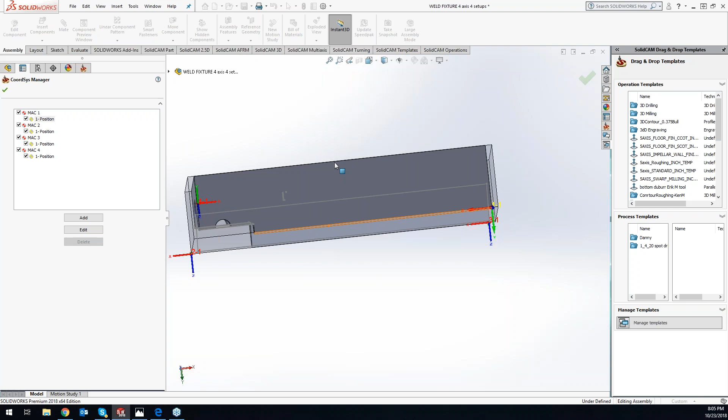That's a great idea. So what I did is I set up my Mac 1, and this is how I would do it, setting up in multiple fixtures, but this is completely up to you guys. Like I said, there's more than one way to do a part here.

I can't say more than one way to skin a cat because Ronnie's got a cat, so I can't pick up. We are animal pet friendly. Yes.

So what I did with my Mac 1, position 1, I want to create a different Mac for each setup. So this is going to be my 54, 55, 56, and 57. My 54 is aligned right with this hole and this flat right here.

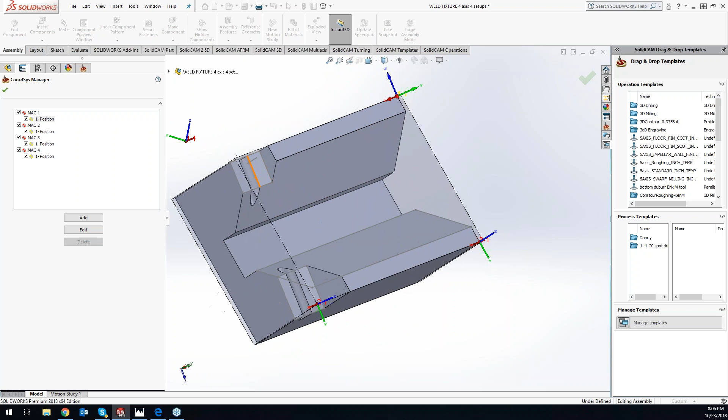So when I grab this coordinate system, all I did is click on here. So when it's sitting in the vise, I can probe off this side, probe off this other side, and then take a Z point right on the top.

Now let me uncheck this one and this one. If we go to our Mac 2, get this flipped around here, we are going flat in here. Basically what I want to do is get the majority of the material removed out of here, is what we're shooting for.

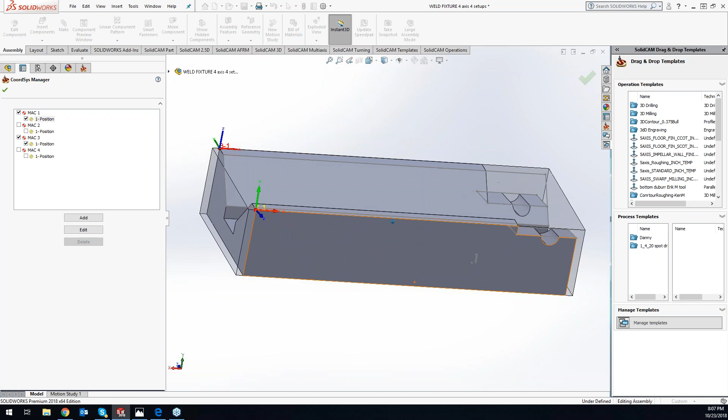Now I uncheck these. I'm going for Mac 3. What was I doing on Mac 3 here? Got to remember, we're straight up and down. Maybe my Mac 2 wasn't straight up and down.

Oh yeah, we're kicked off at an angle here to machine the flats. That's where I was going with it, to machine the flats on here and right here. Mac 3 is going to be straight up and down, getting this material out of here and doing some roughing on here.

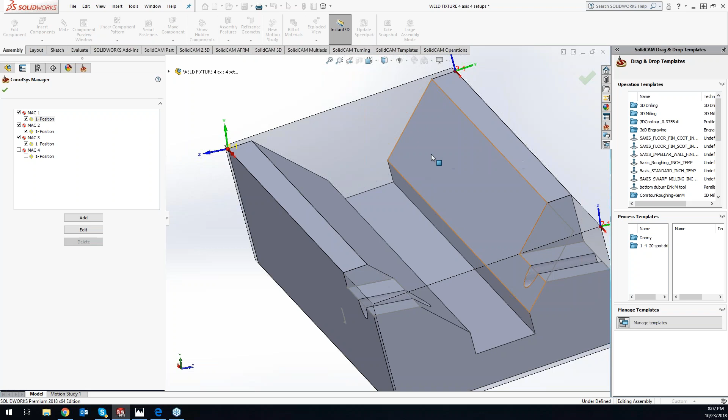And then Mac 4 is going to be our angle. So it's going to be sitting in soft jaws. We'll side mill this face over here and flat end mill the face over here. So hopefully that kind of makes sense for everybody.

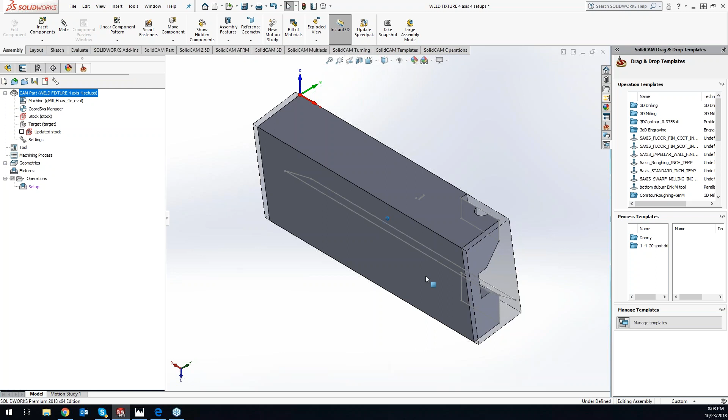So now let's get the ball rolling here with our Mac 1. What I did is I brought in a vise with soft jaws for each setup that I want to be doing. If I go to my SolidWorks over here, you can see I have my Kurt vise multiple different times in here. So what I did is I added these as a display state.

Now, it's completely up to you guys, but I did this as a display state versus using a configuration. The only reason is, with a configuration, I'm suppressing, whereas with a display state, I'm just hiding certain components.

So if I go to display state number 1, you'll see that I have my vise already set up in here. Basically what I want to do is label that as a fixture first. So we'll go ahead and do a machine setup, and we are going to do setup 1 and do a new fixture.

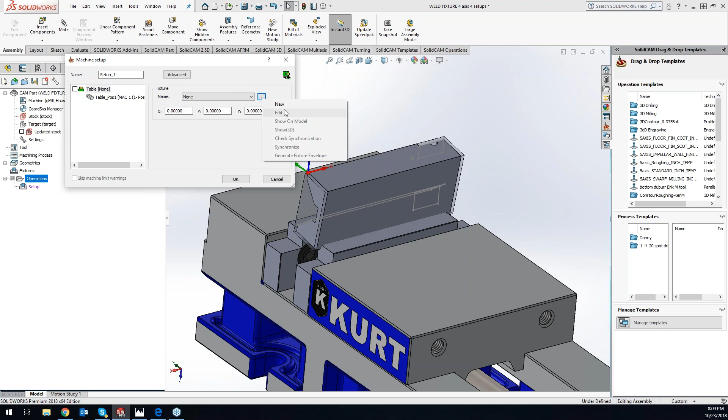And I'm going to grab my soft jaws and my Kurt vise here. Good enough. And we'll just say G54. Save that. Okay, so we got our setup 1 here.

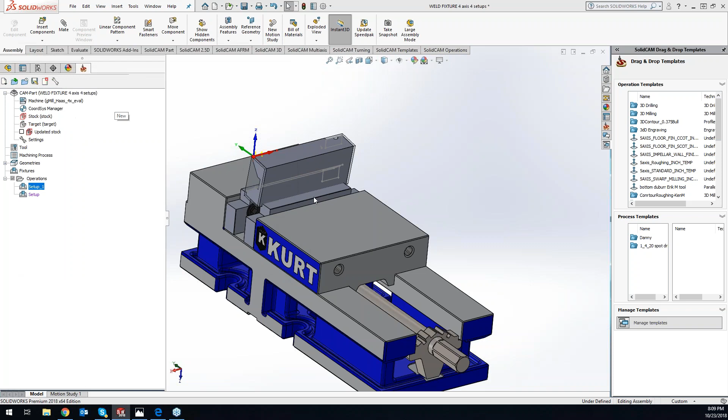So now I can add my milling operation, and we will drill out that hole first. I'll kind of buzz through this. So we got our drill, tool select. I still have my tools in there from last time, so we'll do drill depth, 0, and we'll do a diameter.

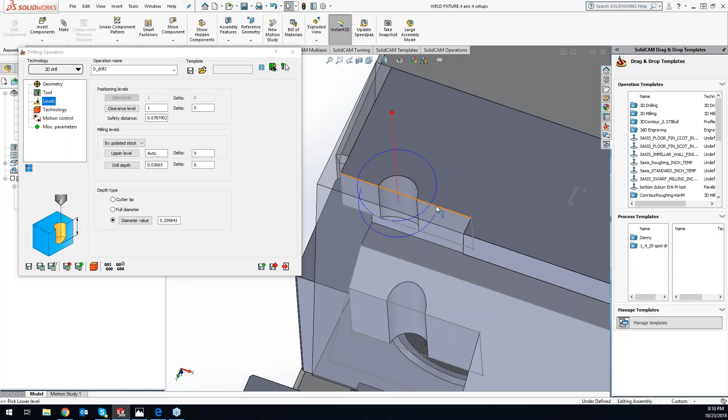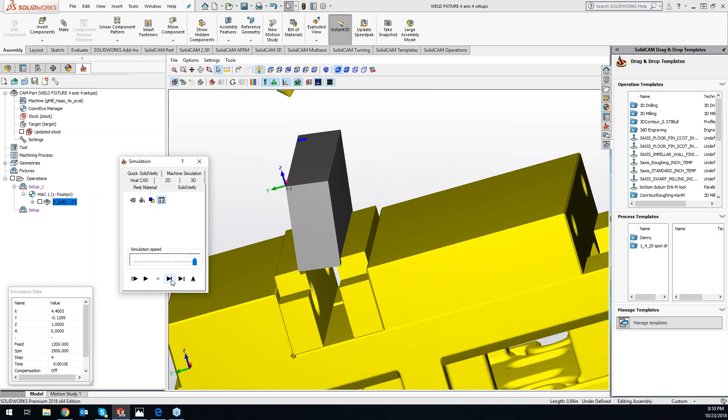Kevin, probably a stupid question, but you're doing all this in 2D, correct? This is all 2D, correct? Yep. Yeah, so we're not utilizing any of the 3D functionality in here.

So pretty much 100% of all our customers can be doing this part. Perfect. Okay, so we got our spot drill.

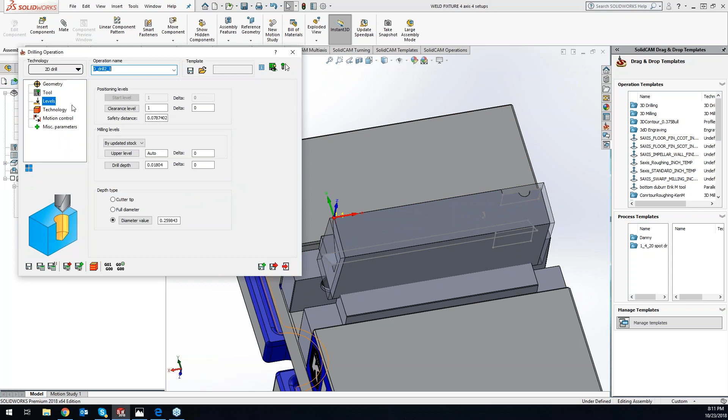I'm just going to do a save and copy here and change up our levels. We'll go down to there and do a minus 25 thou, full diameter, and let's just do a peck, G83, 100 thou, and grab our drill here. All right.

Okay, so now you can see we're drilling all the way through there, looking good. Since I have it kind of everything up, we are sitting at an angle, I'm going to actually machine my sides right now because we do have some stock on there. So we'll just go ahead and add, oops, I don't want to do an iMachining for this one.

I'm going to do just a simple profile.

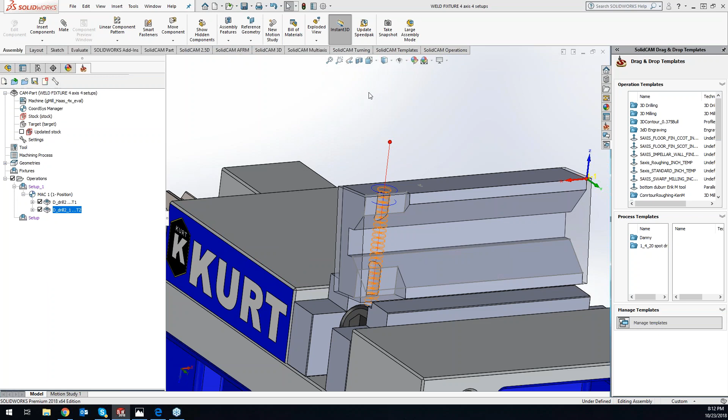Okay, got our geometry, tool, select. Sorry guys, I'm trying to buzz through this as fast as I can because a lot of this is just repeat. We're kind of more focusing on the setups.

Ronnie's already barking at me. Just get along with it already. I can hear you, Ronnie. Don't worry.

All right, we'll just go a little bit past, minus 50 thou. I'll take some rough passes, 25. All right, let's make sure we're up to size.

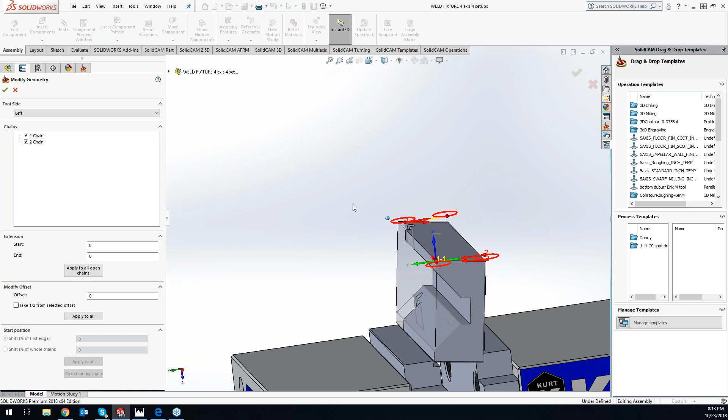I'm shanking out here, so what I'm going to need to do is also extend out my geometry. 0.3, apply all. So I'll verify.

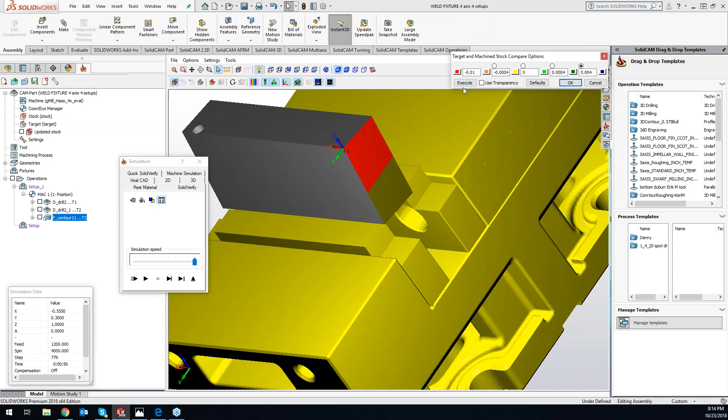Okay, so it's showing a little red right here because I'm shanking out. I didn't put an actual relief shank in there, but we'll just go with the relief shank for right now. Let's just do a stock target comparison.

We're green, and green and yellow is what we're looking for. Let's check our hole for placement. We're green and yellow there, so we're good to go. So now we can move on to our next setup.

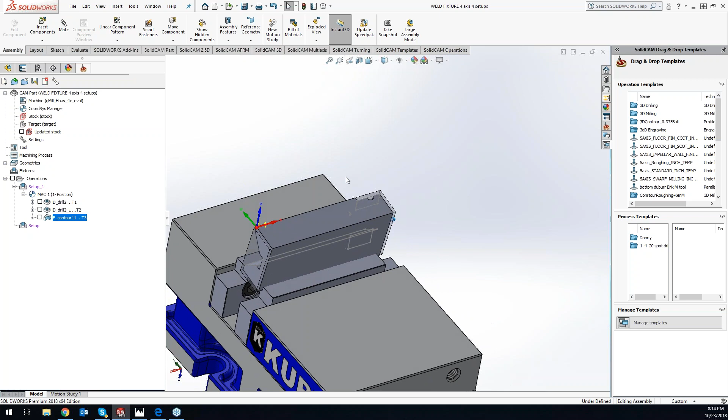So now that is my Mac 1, everything I'm going to be doing on Mac 1. Now let's go ahead and head over to my display state. I'm going to pull up my Mac 2. So now basically what I'm going to be doing is machining off these flats on here.

So let's go ahead and I'm going to do edit the setup, and we'll say new fixture. Grab this and this. Just grab the important stuff here.

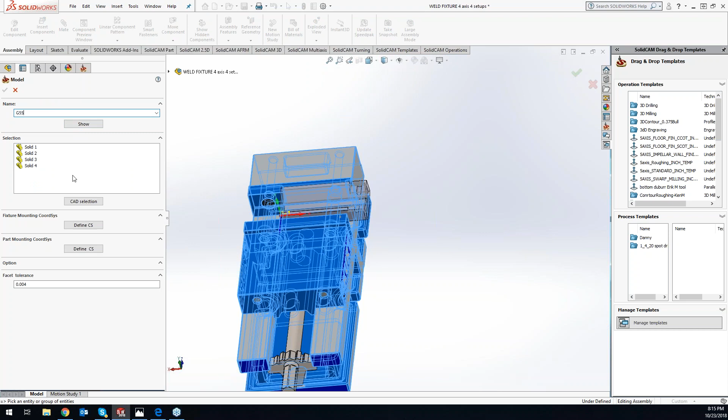I'm going to see if I can actually do edit, and I want to label that as G55. Okay.

Now let's go ahead and add our milling here, and we can go with iMachining here. And I'm going to do something a little bit different here for you guys.

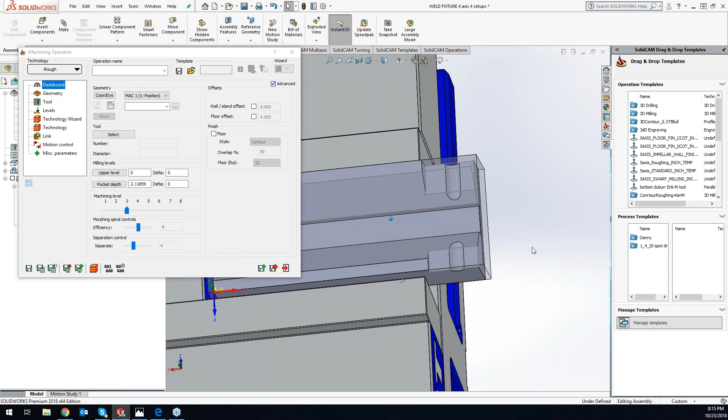So what I'm going to do here is I'm just going to do a quick sketch. And you guys can do sketches while you are in an operation itself.

So now for my geometry, oops, I need to switch this over to Mac 2, which is our 54 or 55. Grab this as geometry, and I'm going to do mark chain as open, and then mark open edges, and I'm going to turn this one into a wall.

Now my levels, and like I said before, since we're working on angles, I always like to click around just a little bit to make sure that number doesn't change. If that number is changing on your depth, that means our coordinate system isn't parallel with that surface there, so we know something is up.

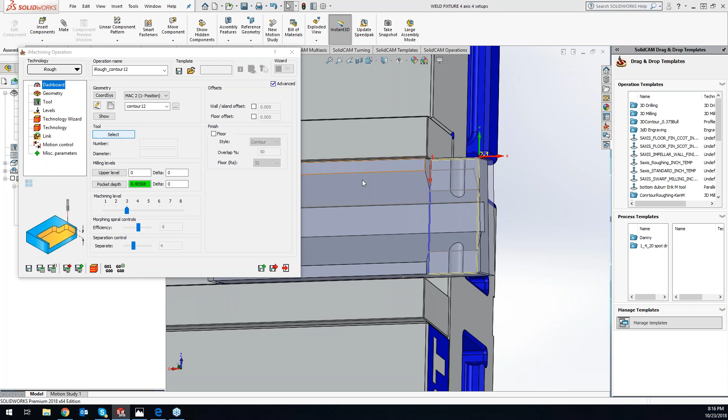All right, so we'll grab a 1/2-inch end mill here, and do iRough plus finish. Compensation, we'll do a floor.

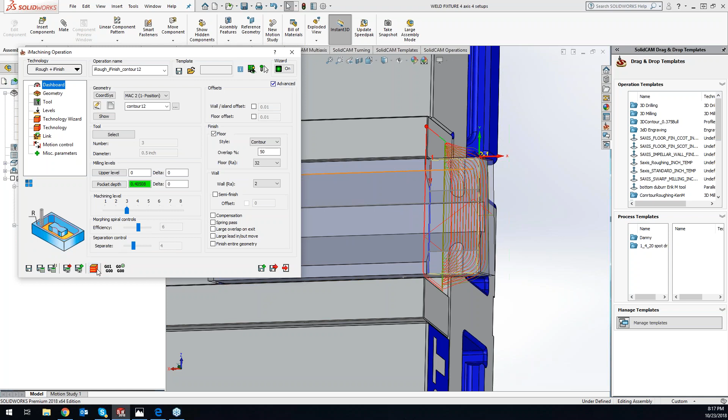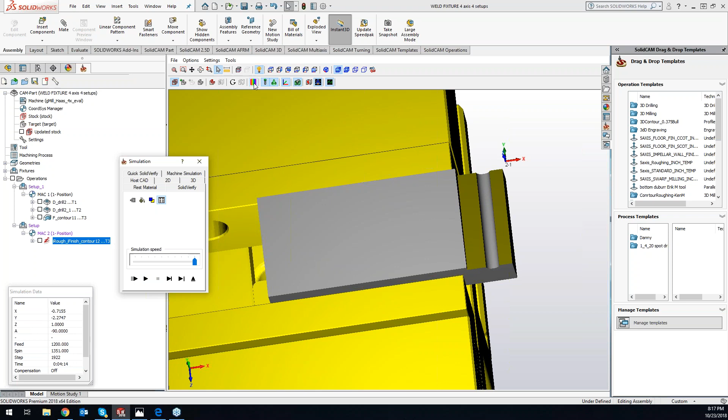And now it will pull in our second setup here. And let's just do a sanity check real quick. So we're green, we're up to size.

And like I said before, usually I should have a 1/10 in here. Okay, let's try this again here. So if I put just 1/10 in there, this all has to do with tolerancing. This model that we're representing right here is not what you're going to see on the machine. It's all tolerancing that I've set up in the accuracy of the model. So I have a pretty tight tolerance set up for this model, so it should show really accurate.

But now if I put a 1/10 in there as my good part, then everything that is at that 1/10 is going to show right up to size. We can even do a side, 3D mouse is stuck. So we got yellow all the way around. We're golden, and that's all I really need to do on that setup.

Now Kevin, while we're going over setups - yep. Maybe you could go over why Mac 2 is in purple text under that second setup. Oh yeah, you can see that. So I missed something on my setup here.

You'll see, so what Greg is talking about is, see how my setup up here is purple, and then my Mac position is in black. Now down here, I have a purple setup and a purple Mac. What's happening here is I didn't link my setup to my Mac position. And thank you, Greg, for that.

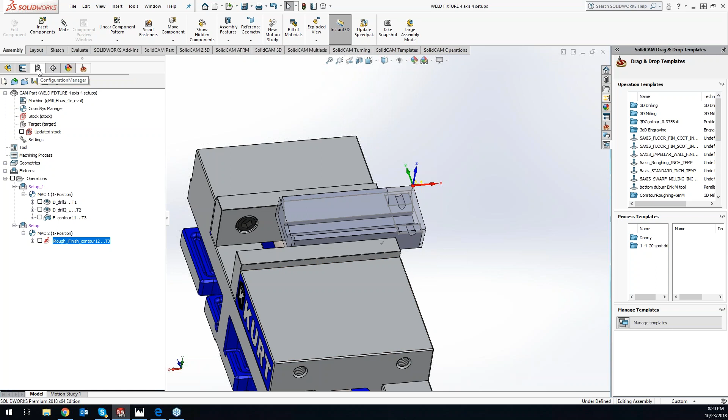So now let's go ahead and hop over to our fixture number 3. And as I'm going through this, if you guys want, let's say you're just running this as one single part, fine and dandy, but you can also think of this as running it on a table. So let's say you have a table with 4 different vices, your Mac 1 is your left vice, Mac 2 is the next vice over, keep going along. This is the exact same way you would set it up that way as well. Just want to let that be known for you guys.

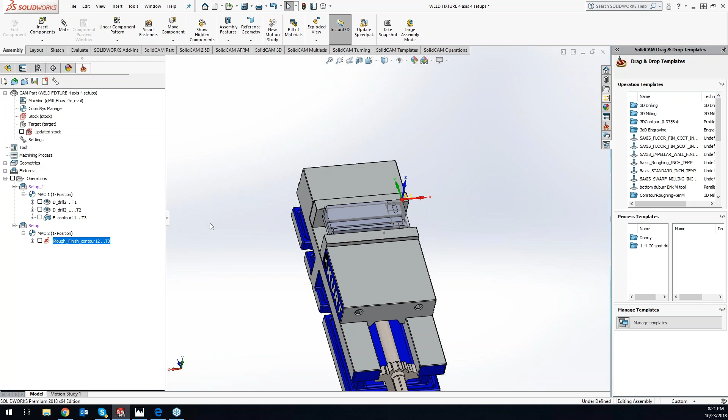Okay, so here is our setup number 3. So basically what we're going to be doing in this one is just hogging out the material inside here, using a basic pocket operation, or iMachining for that fact.

So first thing we'll do is a machine setup, say after that operation, and our fixture is going to be a new one, and we'll call this G56.

And I'll just click on all my components of that fixture. Like I said, I'm trying to do this as if we were using soft jaws in a lot of these parts. Now this one is clamping square on square, so all we'd have to really do is run parallels underneath there. But the ones that are on angles, that would definitely involve milling those angles into those soft jaws, or using a sine plate, kind of like what we talked about a few weeks ago.

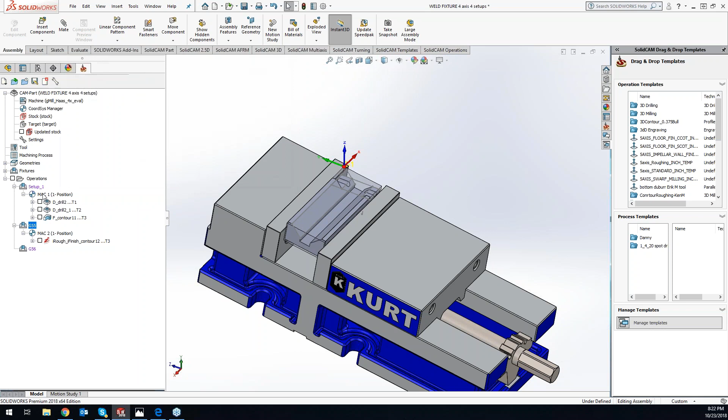Okay, so let's assign this to Mac 3. Hit OK. Now I can also rename these setups here. So I can do edit, and I can just call this G56. Edit, and we'll say G55, and edit G54. Okay, so now on our 56, we can do add milling operation, and we'll just do a simple pocket.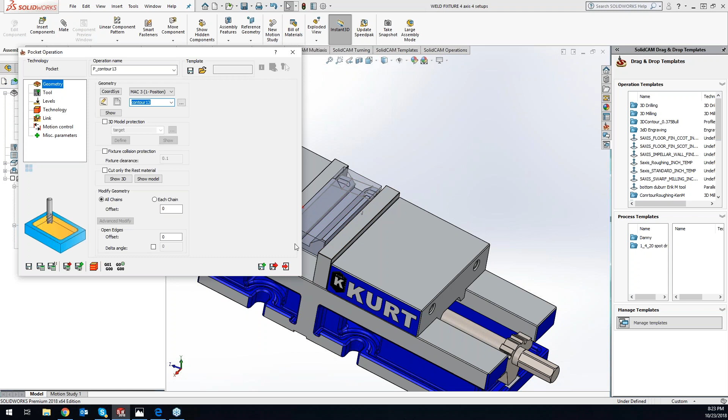And we got our Mac 3 grab, so I'm just going to click on that bottom face using our Smart Face technology. And what is the size of that? That is 0.52, so we can get away with our half inch end mill on there.

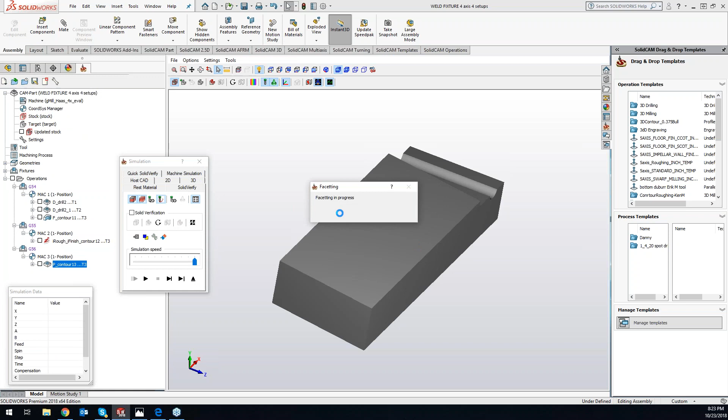Levels, profile depth, get down to here, and we can do step down a quarter inch. Looks good. And since we did use the Smart Face, it knows to start on the outside and work its way in. And when it's doing this faceting process here, it's basically pulling in the fixture that will also have full gouge detection and crash detection as well.

Hey Kevin, you've got a question in the chat area from Brent. He wants to know if you can put the G54 as a text placeholder instead of the 1-position next to the Mac in the coordinate system. Yep, so...

Greg, remind me to come back to that one when we're done here. Okay, well yeah, let's come back to that one. To answer your question, yes Brent.

So let's say I wanted to come in here, and maybe I wanted my position, my Mac 1 position 1, to be 57 for instance. I can just come in here and do edit, right click and do rename, and I can type in there 57 or 58 or whatever work offset you want in there, and it will post it out as that.

Don't do a 1-position or anything like that. Just do, you know, like for this one, we can say 54. We can do rename, we'll do this 55.

And it will automatically add that 1 in there. But you guys can come in here and rename these whatever number you want.

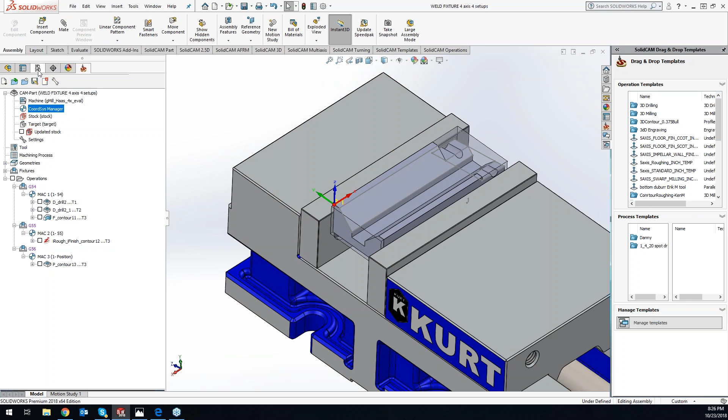So what I'm going to do is go to my display state, go to my setup 4 here, and for some reason that does not look right. Oh, because I don't have my coordinate system. Okay, so we'll wait to add that in there. But my coordinate system is actually up on the top right here.

So what we'll do is add our machine setup and do it after that operation. We'll do a new one, and we'll call this 57.

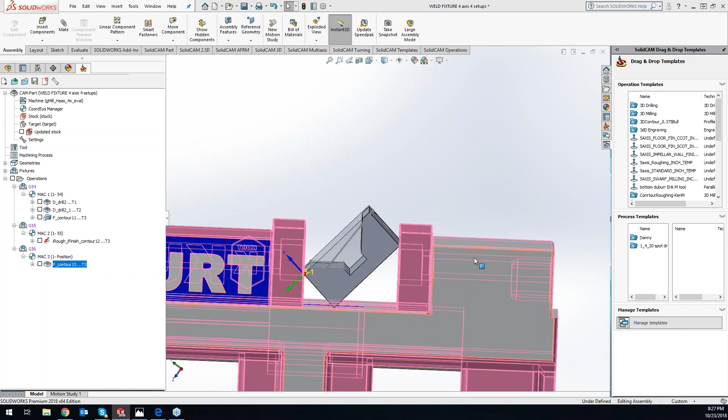Grab that, that, that. And by all means, guys, if you're a little bit newer to SolidCAM, it does not have to be a Kurt vise. You can have toe clamps, you can have vacuum tables—anything you want as your fixture.

Okay, so now let's go ahead and add our milling operation here, and we will just do a pocket.

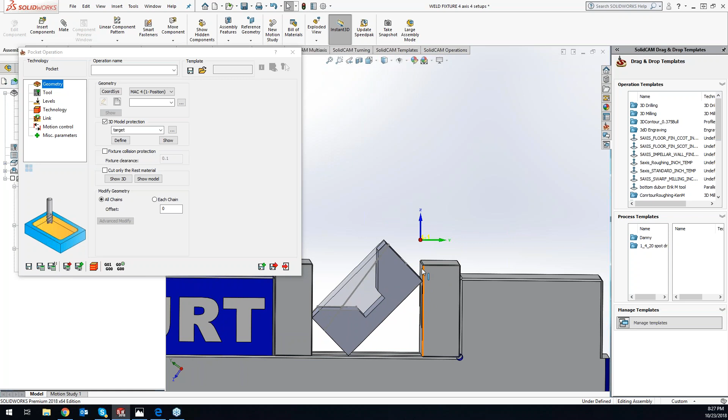So for this one, probing wise, you can kind of see we have a part, or a coordinate system, sitting in space. So how I would probe this part—and obviously, like I said, these would be soft jaws, so they'd be notched out—I would be probing the back of my vise for my Y-axis, coming over here probing the side for my X-axis, and then the top right on this edge for my Z-axis. So hopefully that makes sense for you guys.

So now what are we doing? Pocket. And then we'll do mark open edges, and I'll tell it this one over here and this one right here.

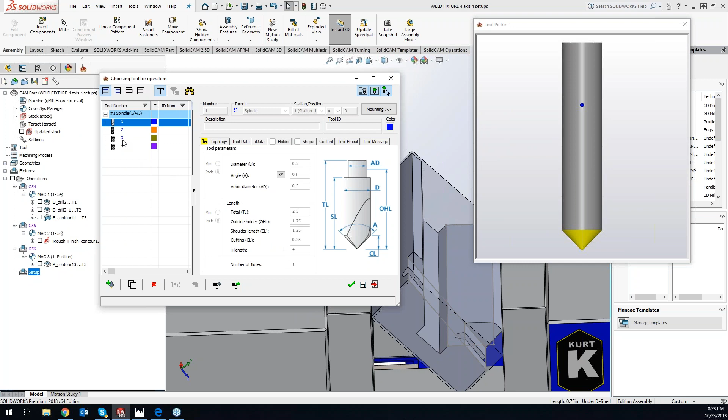All right, tool select. Grab that same half-inch end mill here.

Levels. Like I said, I like to click around just to make sure I'm perfectly level with my axes here. And we can just do 0.100 step downs. Save and calculate.

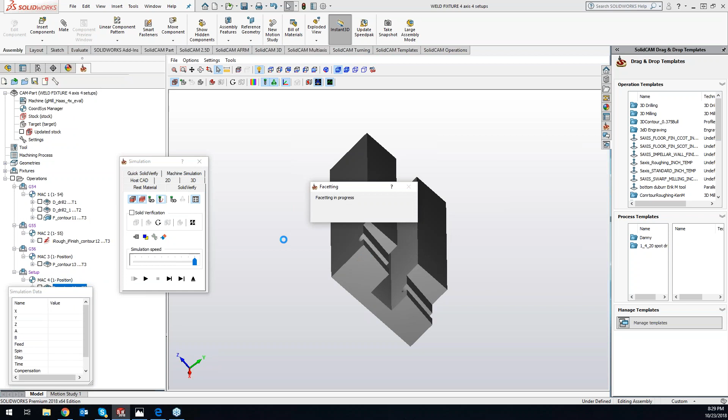We'll give it a second to pull in that vise here. Okay, so now I am machining a little bit of air—you can definitely see that. So let me get that fixed up here.

So let's say our upper level, let's go by stock. Calculate. Now we shouldn't be machining air.

There we go. And let's just do a quick sanity check here. So we're yellow, we're right up to size. So the only thing we really have left is to machine over here. Oh, my space ball is just like, okay.

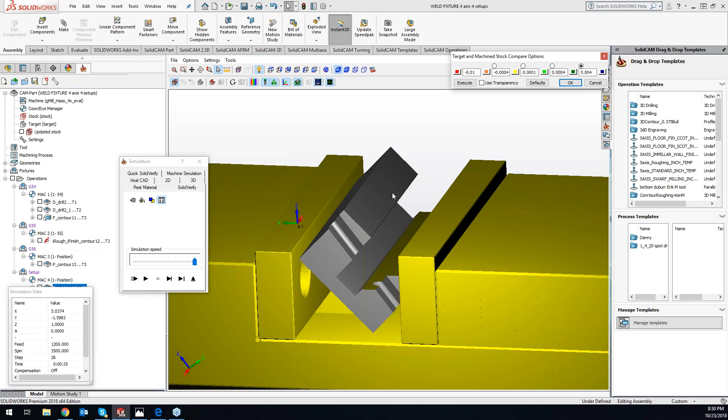So we'll go ahead and do that in the exact same operation we were just in. But what I'll do is use that one as a profile because I can side it—I use the bottom of the end mill to grab this face down here, and I'm also side cutting over here. So we can just do that in a standard profile here.

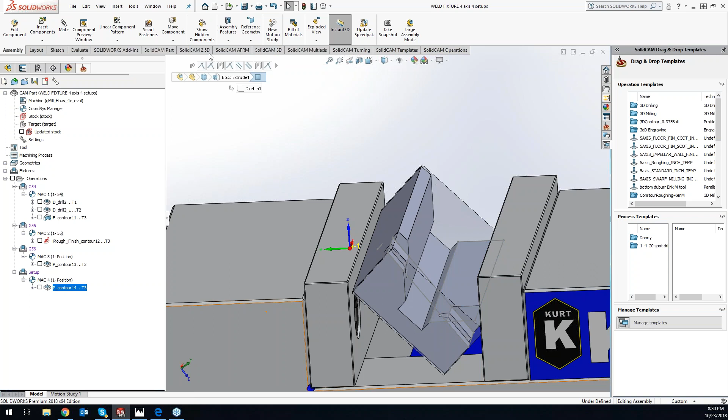Do new. And uncheck my tangent propagation here. And we'll grab that same tool.

Levels, come down to right here. And we'll probably just stay a little bit above because we don't have to go right down to that exact depth, because of this channel in here. So we can just do a positive, like a 10th out here.

Technology. So what I want to do is, if I take this all in one cut, it's going to be a little heavy. So let's just play it through real quick and you'll see kind of what I'm talking about here.

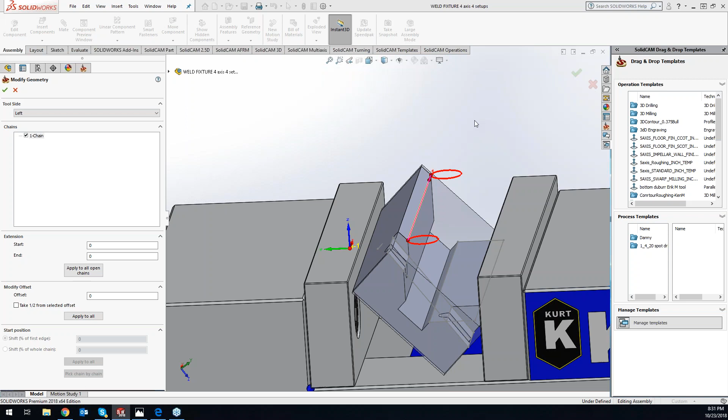So we're taking just a little on the heavy side here. And you'll see my chain didn't go all the way through—that's because I forgot to do one step here. If I go to my geometry button, since I clicked just that chain, we're not going all the way through.

So if I get a top view down here, I can actually extend my chain. We'll do 0.3 for our start. And what's 1.5? Oh, that's a little too much. Do 1.25—that's a good spot to end.

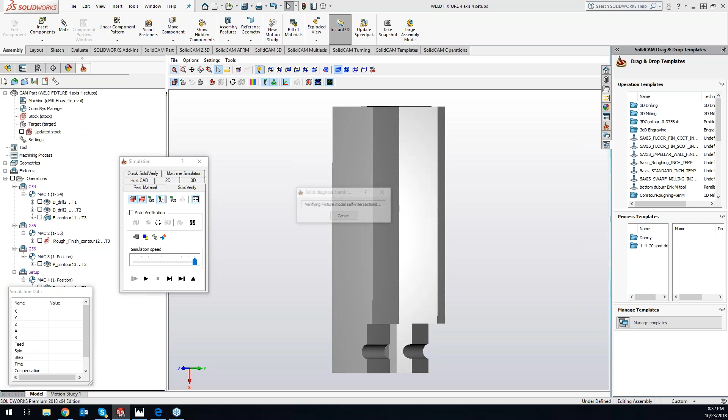Now what we can do is a step down of 0.100, or a 10th out here. Save and calculate. Simulate. Solid verify here.

And I went too deep. The great joys of solid verify. You can see I'm gouging right through there.

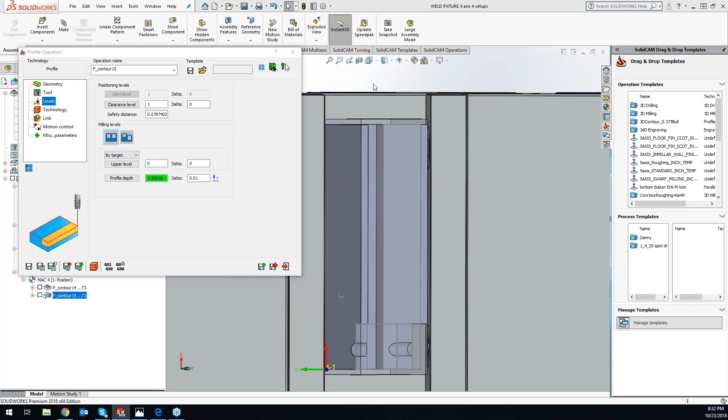So all I have to do is come into my levels here, and we'll just go tell it right to this exact point. I'll just go a minus 10th out, just to go a little bit past. Thought I was going to be safe by going the other route, but forgot about that.

All right, so let's play it through here. So now we should have a 100% complete, all yellow. Let's just get around. So we are golden, we got yellow all the way around. So now if we want, we can go ahead and play this all the way through and we'll be able to see all our different setups as we're going along.

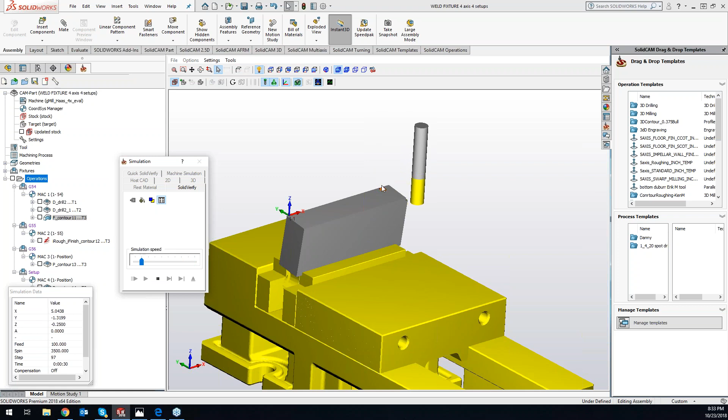So here's our first one. I'll slow it down a little bit for you guys. Spot drill. Drilling. We're going a little deep on this drill, but just wait for 2019 on anybody that does any deep hole drilling, got some cool stuff coming for you guys. Actually, more custom drilling than anything.

Now Kevin, do you have a machine simulation on this post? Looks like you're using an eval post, so maybe not. Yeah, I don't have a machine sim.

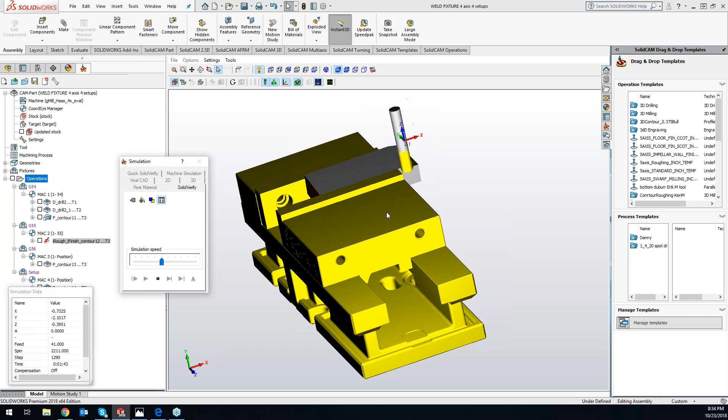Thinking since this is setup focused, you can show the machine preview in each of the setups. Oh yeah. Yeah. Get this kind of rotate around here. Okay, so there we have a complete part.

So let's switch over to a post that has... I don't have this one pointed. Give me 1 second here, guys. Let's see what I have for machine sim on this computer.

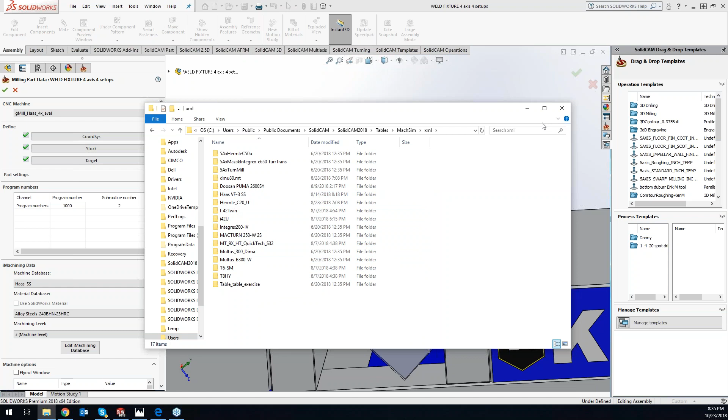VF3SS. So let's go to our Haas, VF3. Continue. Calculate everything here.

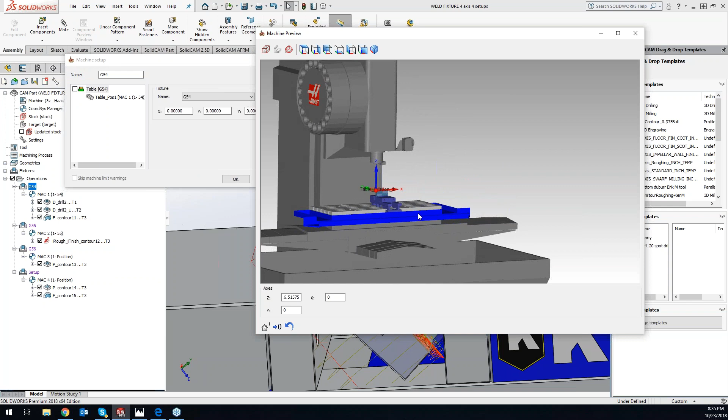All right, so what Greg is getting at here is the machine preview, which is this button right here. I totally forgot about this. So this will actually show you the machine as it sits in there. Now you can see with my machine sim...

My vise is custom made into the table. So what we can do is just highlight the Z, and we can actually raise up that vise to get it so it's sitting right where it's supposed to be. So it's a great feature to have in here, and you guys can see what it looks like on the machine itself. So you can see, maybe with this specific one, we're going to have this vise.

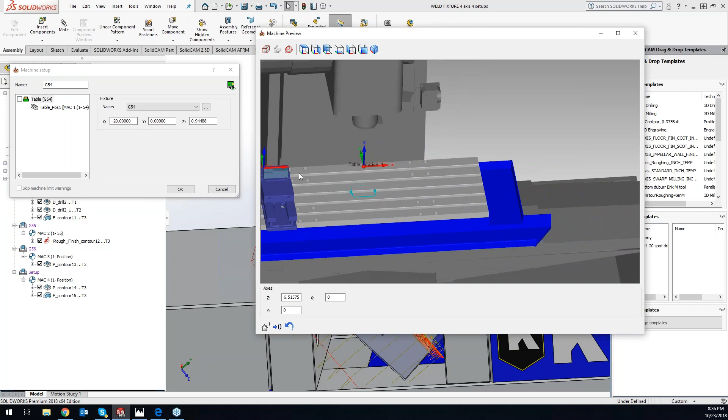I'll just do -20, maybe far over on the right side. Hit OK. And let's do edit, machine preview here. And that is definitely not how my vise is going to be sitting.

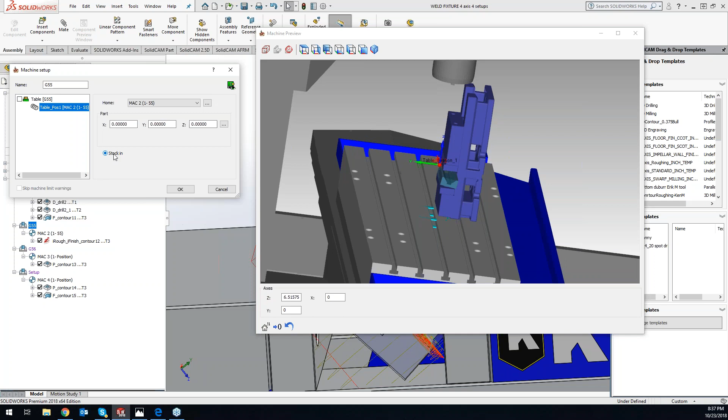Why is my vise sitting straight up and down here? Is that where I'm at 2? I believe on that one you created that fixture in Mac 1, so you'd have to reassociate the coordinate system for that fixture. But this is my 55, right? Yeah.

Oh, because I switched the 55 name, right? Yeah, you switched it after you defined that fixture. So it was still on Mac 1. Edit.

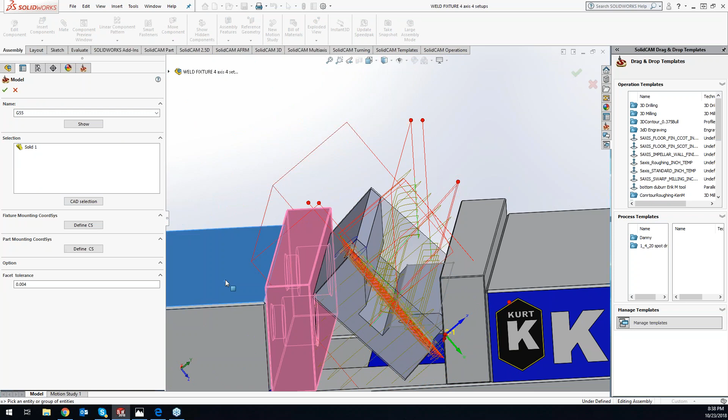And we'll just do unselect all. Come on Steve, you were falling asleep on that one, you should have known that one. Hey, remember man, I'm just a sales guy.

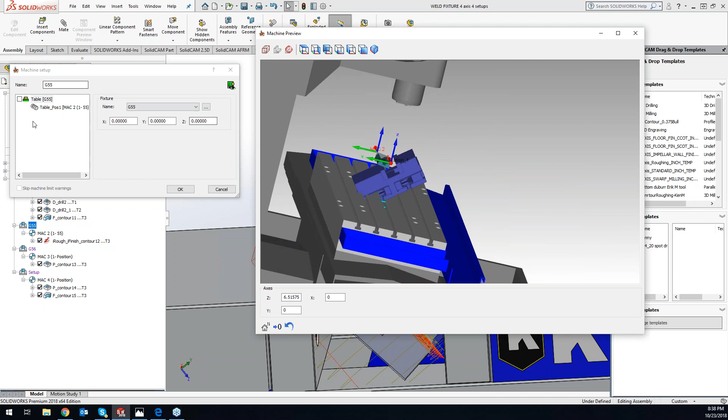No? Why am I all funkied up here? Back to... edit that position. Edit the fixture. And now take a look at the fixture mounting coordinate system to the part mounting coordinate system.

Okay, good call, there we go. That's what I messed up here. Edit. New. I'm a little rusty at these night classes here.

So now... I was just going to say, as you can tell, they're done live, not recorded. Yes, right? I want to keep these as live as possible for you guys so you can see. No. There we go.

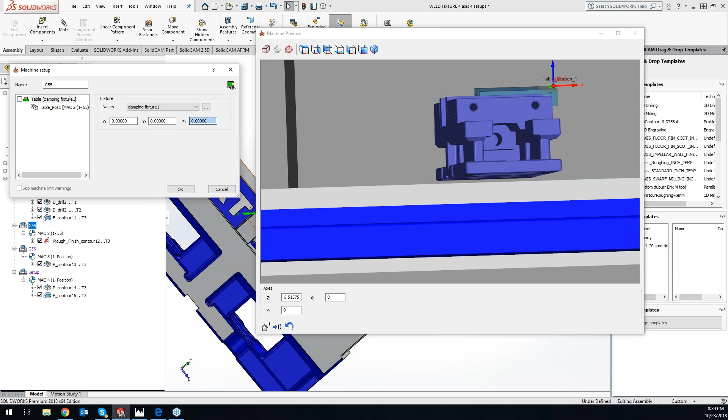And so let's see, our Z is sitting up a little bit, so we can lower him down. And we can, like I said, we did -20 on the first one. We can do like -10 on... oh, that's going to be a little close. Let's do -5 on there.

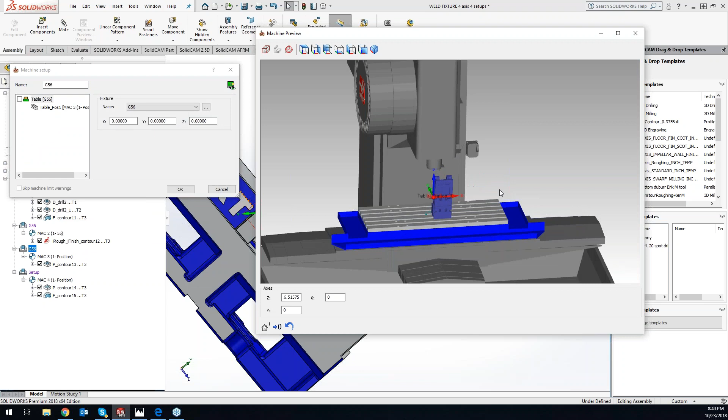And let's go ahead, edit this, machine preview. I messed this one up too. So let's go to my display state number 3 and do edit, new, and fixture.

There we go. And then this one, like I said, we can lower down in our Z, just highlight that, use your center trackball, and we'll put this at 5. Hit OK. Edit.

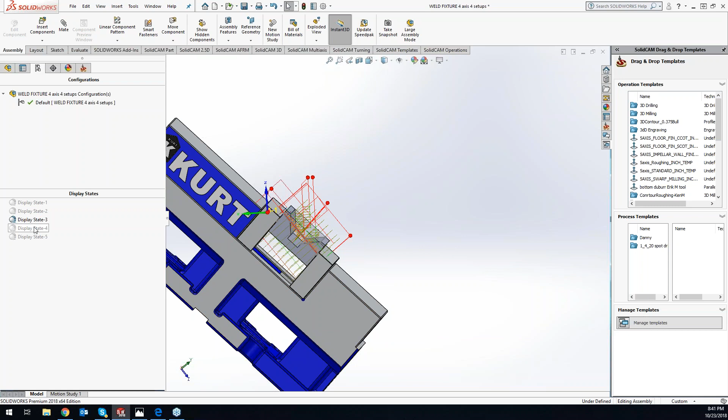This is why it's good to have that machine preview. So we'll go to display state number 4, setup, edit, new.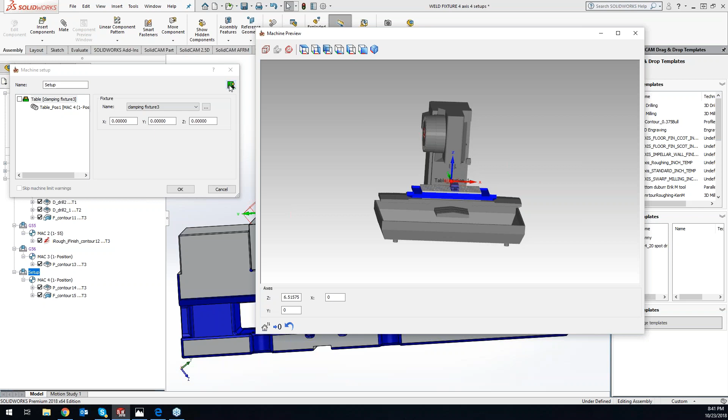That's Mac 4, yep. And there we go, so this one will move over at 15, so it's on the far right side. I'm kind of setting this up as if we were to have all 4 individual vices going on here. Now let's go ahead and go to Operations, Simulate, and do a machine sim for you guys.

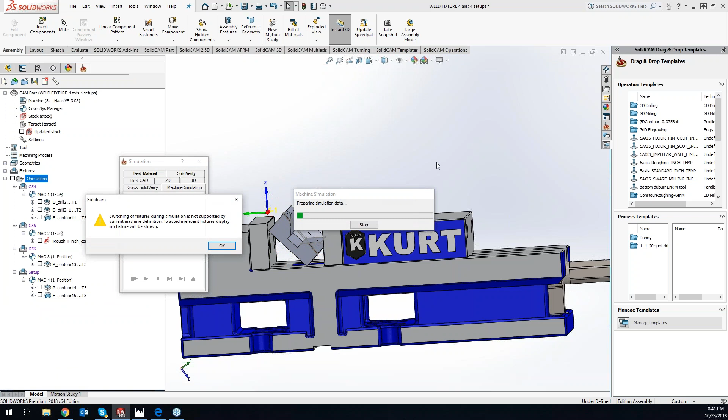This machine sim may possibly not be set up. Yeah, it's not showing my fixture or my part here. Something's going on with my machine sim, so next week I promise I'll have a full working machine sim for you guys.

But that right there is everything you guys want to do when you have multiple fixtures with multiple work offsets and different configurations of your fixtures itself. So we have a setup for G54, a setup for G55, a setup for G56, and a setup for G57. So did I miss anything?

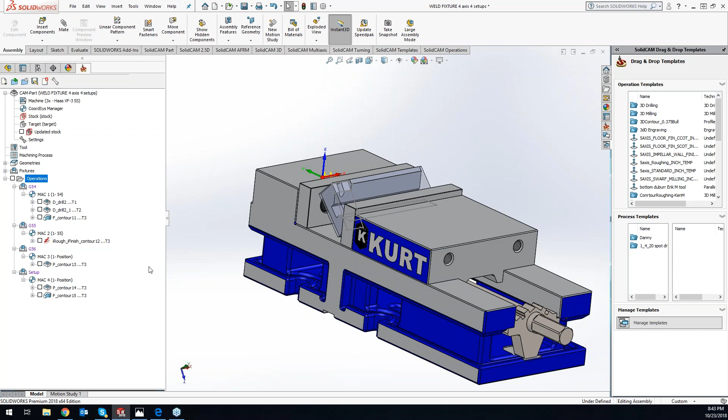Oh, so Eric, you said you missed the first half of the video. So basically what I did is, instead of creating configurations - and configurations work really good, like when you suppress components and stuff like that - what I did is I created display states, and with display states it's just visualization, what you're seeing.

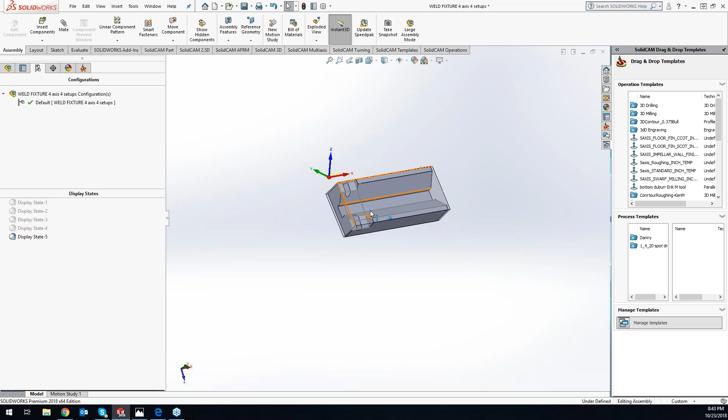So if I go to display state number 5, I have nothing showing right here, but I set it up so display state number 1 is my fixture for Mac 1 position 1, and you can come over here and see everything is hidden except for my fixture 1 here. You can see I've got quite a few different ones in here, and as I was adding fixtures, I was just adding them as display states.

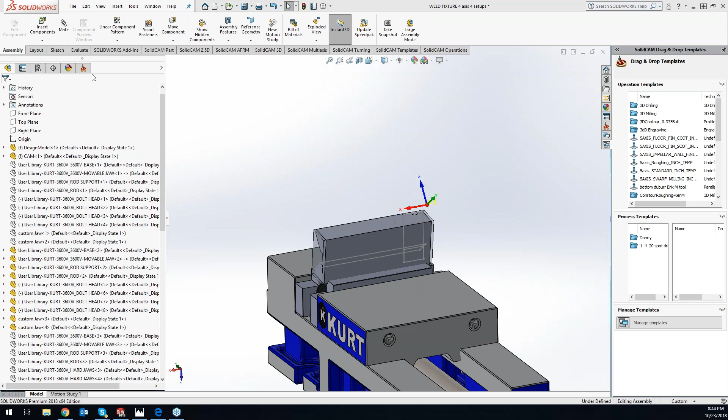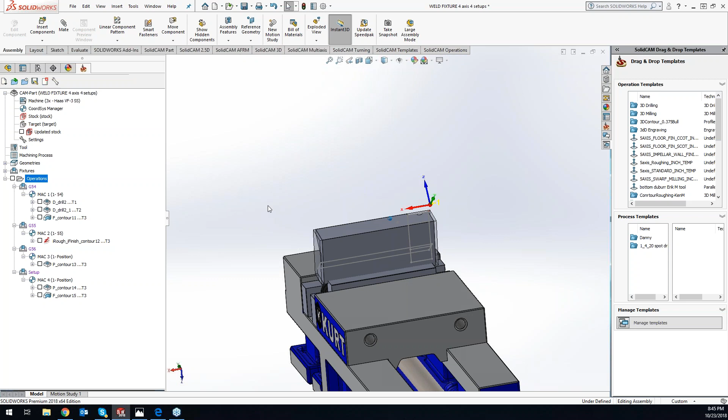All right, so next week we are going to do one more part. The customer asked that we show his part being programmed live, just to get ideas for himself and hopefully get ideas for you guys as well on programming different parts. I haven't seen the part yet - it's labeled as wheel, so it'll be interesting to see what it is.

And then after that, what I want to do with you guys - actually, because it was Ronnie's idea, I'm going to put Ronnie on the spot for you guys. And anybody else, let's throw Rick on the spot, just because I got to meet you guys in person. Same thing with - what did we lose, Brad Denton? Oh no, he's still here. Maybe Brad Denton too. And I'm not going to throw a hard part at you guys.

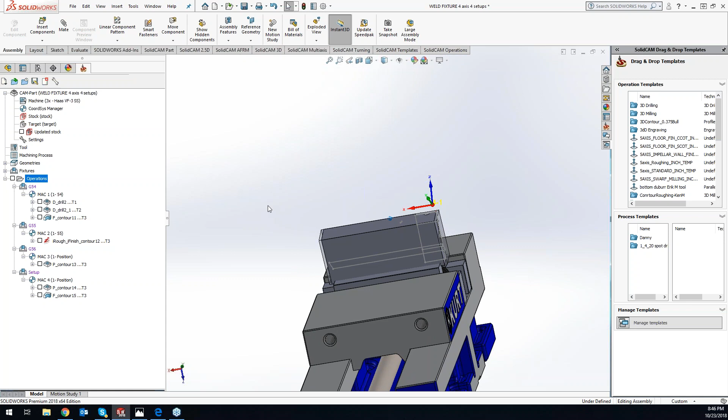We're just going to keep it simple, easy, but I want to get your guys' take on how you would machine a specific part. Rick, you've got a lot of good experience, Brad Denton's got a lot of great ideas, and Ron, you've got a lot of great ideas, and all you guys have great ideas. I want to share your guys' ideas with the community itself.

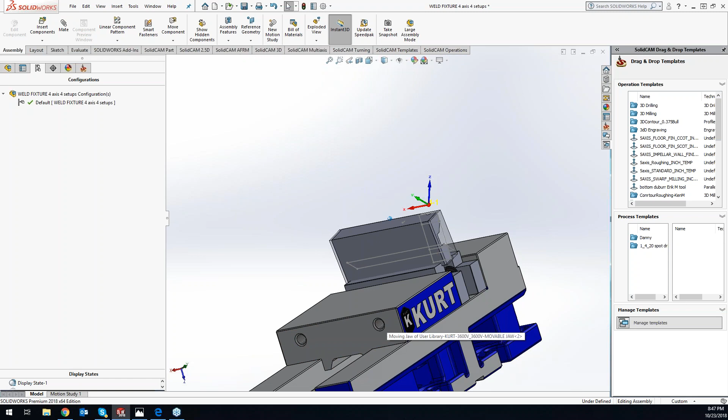Does display states - is that available in SolidWorks? Yeah, yep, that's all done in SolidWorks. Okay, so that's right under your configuration tab, and normally display states is sitting just like that down there, so it's kind of hidden down there. Not a lot of people know about it. I kind of see it as: I use my configurations as suppress and unsuppress, and my display states as hide and show.

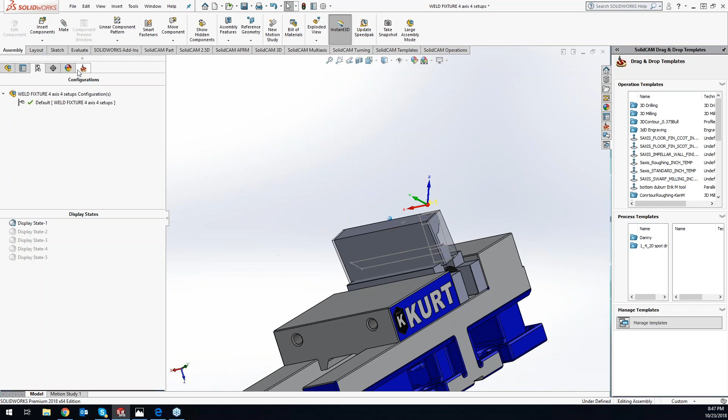So if that kind of helps out, you can hide and show stuff over here versus suppressing. And the reason I like to use display states versus configurations and suppressing is since my fixtures and everything is constantly being updated and moved around, when I suppress something, I may have something that comes up in the list right here that can't be found because it's suppressed. Versus if I just hide it, it's still here, but I can't see it and I can't click on it. So hopefully that makes sense.

But to give you a look, let me go here and we'll just do show. So this is basically a 4 setup part right here, but look at all the different fixtures I have going on right here. That's why I set up the display states, going through it, and it makes it much easier to toggle through when you guys are working on multiple different fixtures.

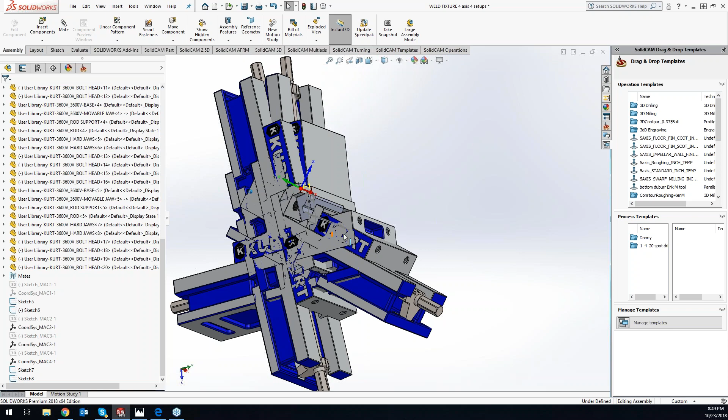And like I said, if you guys have ideas, I see a lot of new names in here, I love seeing that. I got a bunch of people in here tonight, which is great. If you guys have ideas, let me know. If you guys have a part that you want to see being machined live, send them over. Looking for some great ideas. I've gotten a lot of great ideas from you guys already, and we're getting those incorporated in there and getting the ball rolling for these next few night classes for you guys.

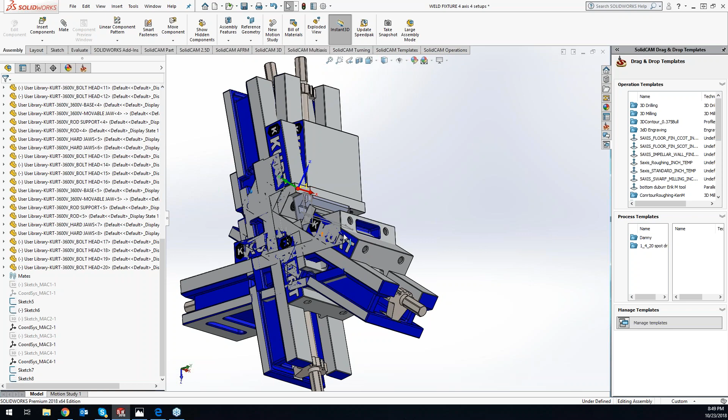But I do want to throw a shout out to, and he's not even in the night class tonight. He's going to watch it on YouTube though. Okay, so shout him out. Yeah, so both Greg and I were at IMTS. Well, Steve was there too, but Steve's not cool enough to get a shout out. So, thank you very little.

But this is kind of coming from one of our customers here, Eric Moon. I talked with him a lot in the night classes. He actually makes these wallets, and he hooked Greg and I up with some of these wallets. If you guys look, I mean I've been old school, I got the checkbook and all the other cards in the big old honking wallet. This thing is sweet. So I just want to give a shout out to Eric, because these things, you can get them in titanium. These are all done in SolidCAM. These things are really cool for being a wallet holder.

I just want to give a little shout out to him as well. Nice, alright guys, I don't see any other questions here. Yeah, if you guys want to check out Eric Moon, it's Decadent Minimalist Design. Yep, really cool stuff.